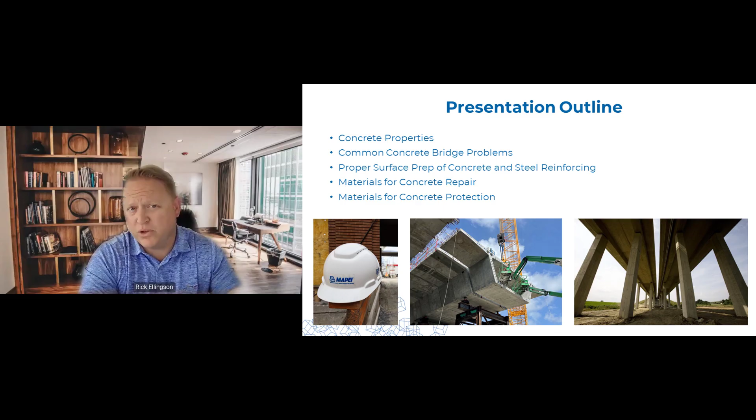Here's a little bit of the presentation outline today. We're going to talk about a review of some concrete properties, some common bridge problems that we see, best practices for surface prep of the concrete, surface prep of the reinforcing steel, some materials for concrete repair, and then also some materials for concrete protection and concrete strengthening.

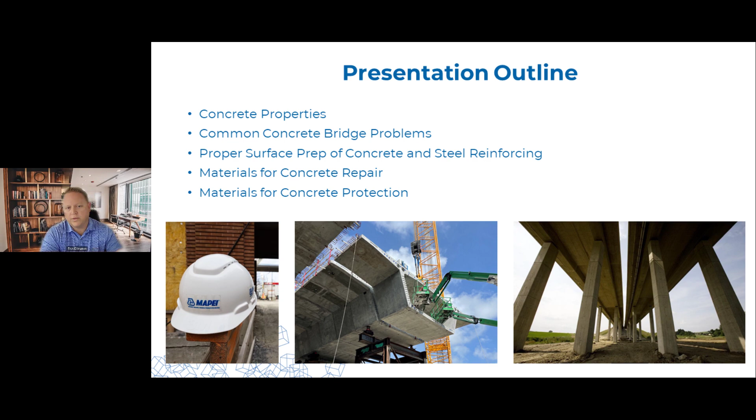So a little bit of background on MAPEI. MAPEI is one of the largest chemical construction manufacturers in the world. We are headquartered in Milan, Italy. Over the last 85 or so years, this kind of shows an expansion of our company globally. We have 24 different product lines where about 6,000 products fall into those 24 lines. Here in the U.S., I represent one of those lines. I'm knowledgeable on that, but I'm going to be talking about quite a few different products today.

One thing about MAPEI being an Italian company is it has this Italian culture of quality. If you think of any Italian product that is manufactured, whether it's Italian cars, Italian shoes or clothes, suits, you always think quality, and that's a cultural thing, and it's the same with MAPEI's products. Being in the industry for a little bit, I've never heard bad things about the quality of the products, and I tell people that we make a top shelf product at a middle shelf price.

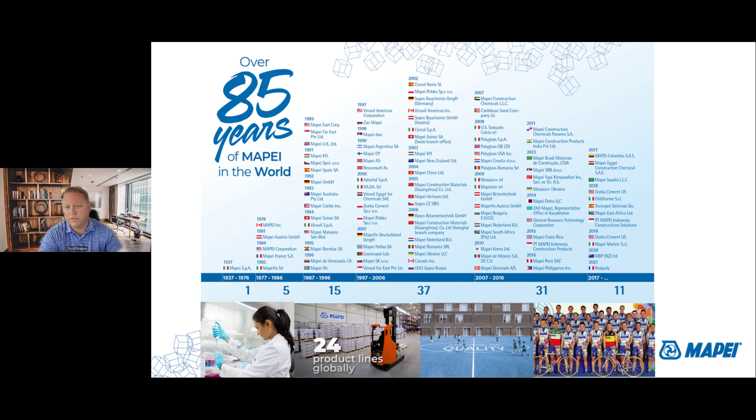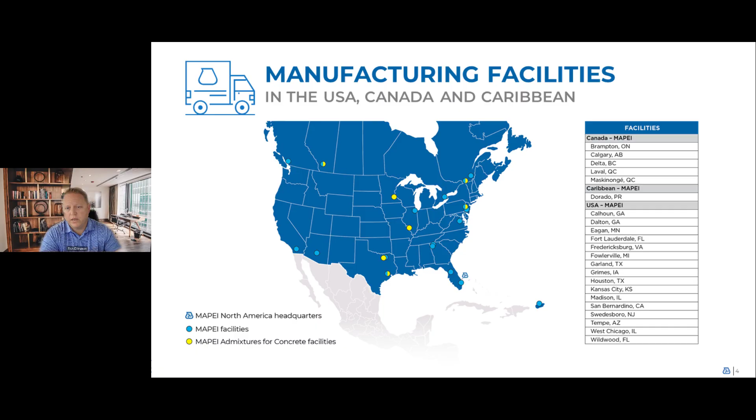For those not that familiar with what MAPEI actually makes and produces, a lot of people have recognized our name because of our sponsorship in the sporting arena over the decades, specifically with cycling, with the Tour de France. This year here in the U.S., MAPEI is the official sponsor of the Andretti racing team. So if you watch any Formula One races, keep an eye out for the blue MAPEI car. Although we are an Italian company, we manufacture our products here in the U.S. We have about 15 manufacturing facilities here in the U.S., and a handful of those also in Canada.

And so on to bridges. This is just a snapshot of the condition of our bridges right now. This is from the American Road and Transportation Builders Association. As you can see, although there's a slight improvement over the last 5 or so years, we have a lot of work that needs to be done. We have about 617,000 bridges in this country, and the issues can range from concrete deterioration to corrosion issues to inadequate funding as well.

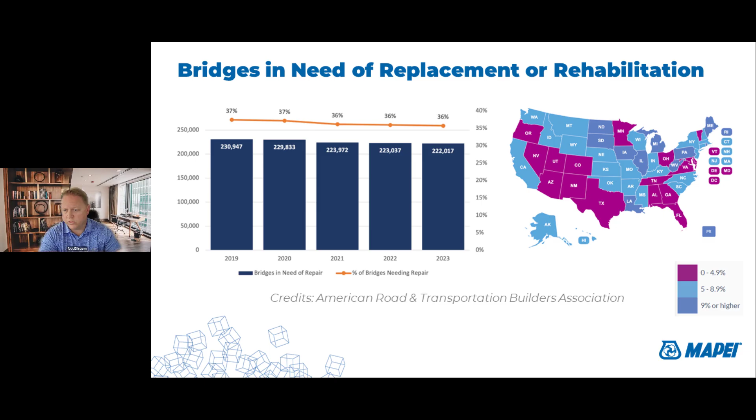Over the last 24 years, this is a list of bridges that have collapsed. There's been about 40 or so bridges that have collapsed. Some of these from deterioration and corrosion, not all of them. If you look at the bottom one there, the Francis Scott Key Bridge, we all know what happened there.

That wasn't necessarily from deterioration, but from a ship hitting it. But when these bridges are being built, and same with buildings as well, they're built to be safe, but not too safe. We can build things even more safer, but it becomes cost prohibitive. So we try to have enough safety factors in there to make sure it's going to be safe for the public's use, but also economical for us as taxpayers.

Now, the Infrastructure Investment Act does offer some hope, but the sheer scale of the problem our bridges are facing is going to be tough to tackle. We're going to need continued or sustained funding, and also innovation with products, having different manufacturers bring new ideas to the table. So that's one of the things I'm hoping to do today, give you a lot of the options that are out there, with MAPEI being one of the larger manufacturers of these products.

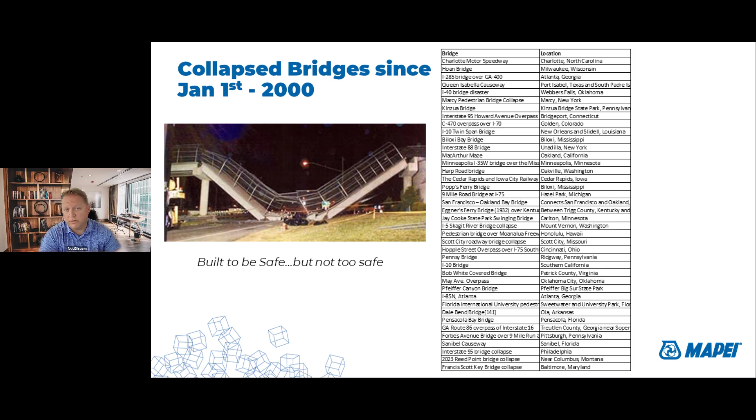What can you do? So a little review on reinforced concrete. It's more than a hard gray rock. Concrete, it breathes, it moves. New concrete is at its largest volume when you first pour it, and over time it's just going to shrink. Compare that to the reinforcing steel, where the reinforcing steel is at its smallest volume, and it's just going to expand over time.

The high alkalinity of the concrete forms a protective passive layer on the reinforcing steel, which helps delay the onset of corrosion. But over time, the ingress of chlorides and carbon dioxide through the concrete cover takes place, through the pores of the concrete by a process of diffusion, and then the onset of corrosion begins. This is when the passive protective layer on that steel becomes destroyed.

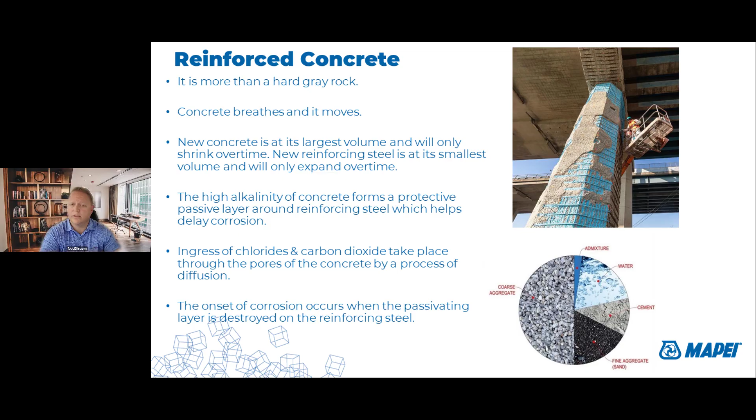So what can go wrong with concrete? Quite a bit. You can have corrosion. This is something that our industry sees quite a bit from either de-icing salts in mountainous regions, DOTs that use that to try to keep the public safe while they're driving, or in coastal areas from the salt-borne air, also working its way through the concrete cover.

You could have carbonation, freeze-thaw, cracking. You could have alkali-silica reaction or delayed ettringite formation. Cast-in chlorides, we don't really see that here in the U.S. We see this a little more in third world countries where they're building something by a beach with sand and ocean water, and sometimes that gets mixed into the concrete and causes problems.

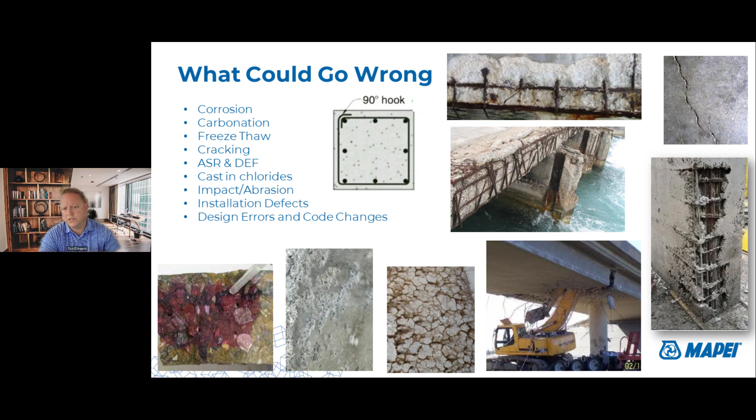You can have impact or abrasion damage. You can have installation defects. They form this and pour it and pull off the forms, and you see all this honeycombing and voids in the concrete. What do you do? And then you can have design errors and changes to the code as well.

So for corrosion, chlorides are typically going to be the most common cause. I mentioned the de-icing salts and the coastal areas. It takes a while for it to move through the cover, but once it gets to the steel, corrosion is off to the races.

You have carbonation. This can typically be seen more at historical or industrial sites where you have a higher level of carbon dioxide. And then sulfates. This is typically coming from the soil in the ground. So the concrete is up against the soil, especially for footers and whatnot, and it can react with the concrete. Sometimes this can take a while, but I've also heard stories of projects where this became an issue a few years after new construction was done.

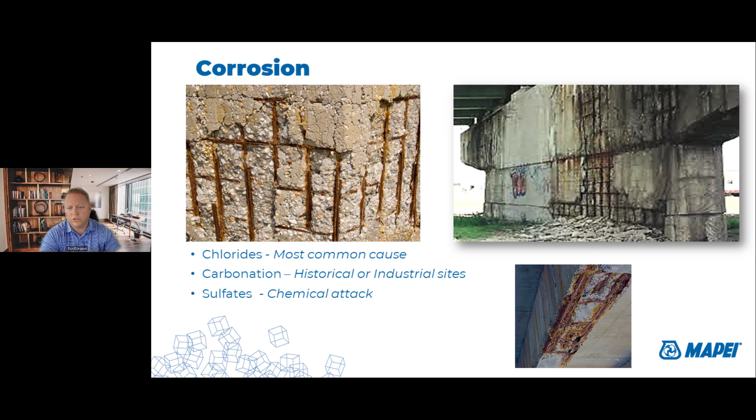The anode is losing electrons, so the electrons are flowing from the anode to a cathodic spot on the steel. It could be right next to it, it could be another mat down. A lot of reinforced concrete steel is all tied together so the electrons can flow to where they need to go. And when this happens, the steel at the anodic region begins to expand, and steel can expand about 7 to 10 times its size, and that introduces additional tensile stresses in the concrete, causing it to crack, and then you have a path for more and more chlorides to get in.

So there's some things you can do for corrosion prevention. This is typically as you're looking at building a structure at the beginning, what can you do? You really want to keep the concrete dry. This can be done through silanes, siloxanes, different types of waterproof membranes.

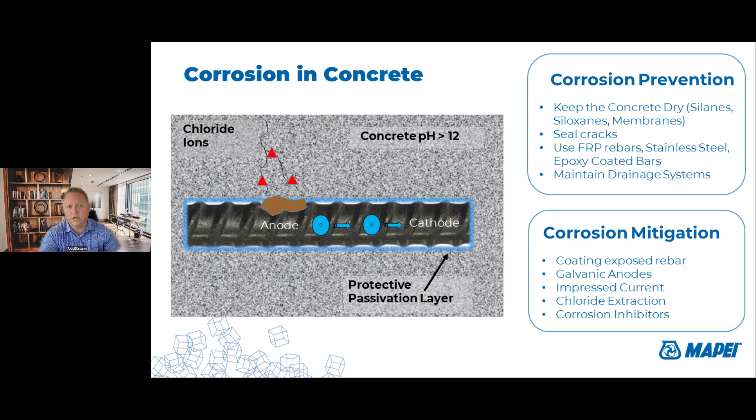There's even chloride extraction, where they exploit the polarity of the chloride ion and try to pull it out of the concrete cover. And then there's different types of corrosion inhibitors that can get sprayed on the concrete as well, and they work their way in and interact with the steel.

So for carbonation in concrete, this is where carbon dioxide penetrates the concrete and it reacts with the calcium hydroxide and produces calcium carbonate. This is going to lower the amount of chloride ions needed to promote corrosion. So typically if you have carbonation in conjunction with chlorides, that's a bad combination. It's just going to accelerate the problem.

Carbonation is generally a slow process. It's seen more in historical structures or industrial sites. Carbonated concrete has a pH around 8.5, where you compare that with new concrete, pH around 12, 12.5.

One of the things you can use to see if you have carbonated concrete is called the phenolphthalein test. It's a dye indicator where they will paint it onto the concrete or spray it on. And if your concrete is pink, you're good. If it's clear, that shows that you have carbonated concrete, and then you can measure the depth that the concrete has become carbonated.

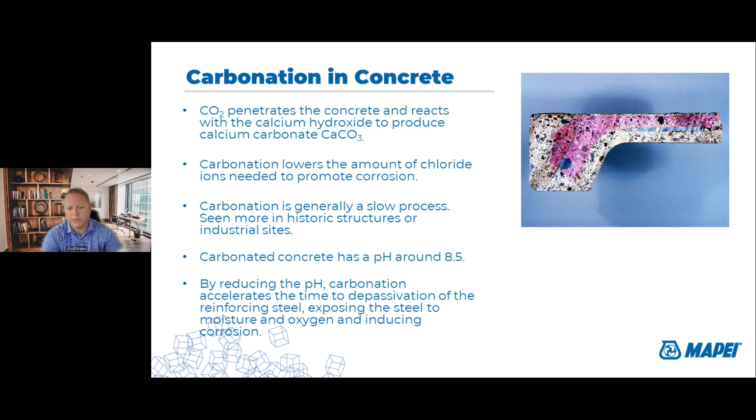By reducing the pH, carbonation accelerates the time to depassivation of the reinforcing steel.

Another problem is freeze-thaw or scaling. As water freezes, it expands about 9%. In moist concrete, this produces a pressure in the pores and capillaries that exceeds the tensile strength of the concrete. This cavity is going to dilate and rupture and can eventually result in scaling, cracking, crumbling of the concrete.

I was subject to this just at my own house a few years ago. I was making some concrete pavers in my backyard for a patio, and I looked at the weather and saw that the temperature was going to drop below 32 degrees for about 1 hour. I risked it. The next morning I woke up and I had all this scaling. So I knew better, but I won't do that again.

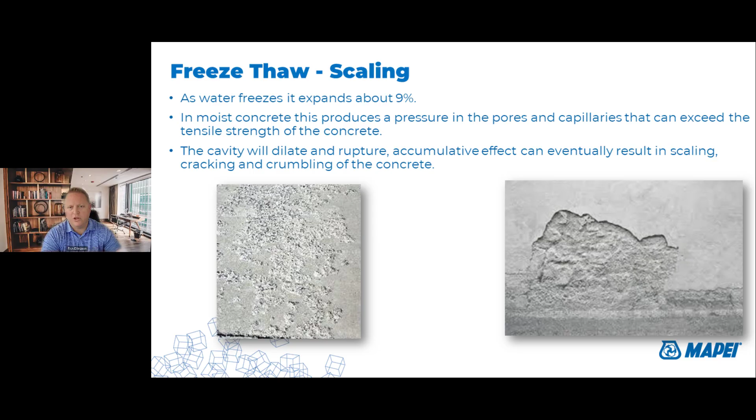Cracking. A windy day can cause rapid loss of moisture at the surface of the concrete. Cracking can come from tensile stresses in the concrete. You can have too much water in the mix, which reduces the strength. Excess water also evaporates and shrinkage occurs. You have seismic events that lead to cracking, corrosion obviously, lack of control joints, and then too little cover or too much cover.

So one of the things that structural engineers, or just engineers, can do is add additional cover to your structures, which is going to significantly increase the life cycle and the durability of them. That just has to do with increasing the path that the chlorides or carbon dioxide have to travel through the cover to reach the bar.

And some concrete members are going to, per code, require a little bit more cover than others. The problem is it's not just 'let's add more cover,' because if you have too much cover without reinforcing going through it, then your concrete's going to crack, and you just negated the whole reason for that cover, because now you have a crack. It's a deep, nice highway for chlorides and moisture to get deeper into your structure.

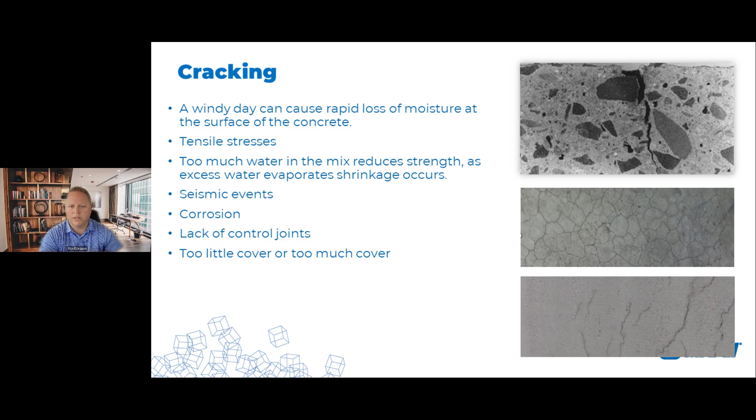Alkali-silica reaction occurs when alkalis from the cement react with certain types of silica minerals present in the aggregates. An expansive gel creates pressure and cracking on the concrete. It's a slow reaction that occurs years or decades after construction. So a lot of people refer to ASR as the cancer of concrete.

There are things you can do on the front end. You try to opt for low alkali cement and non-reactive aggregates. There are different types of admixtures you can use that have some pozzolans to mitigate the alkali content in the cement. You can use different types of coatings or sealers as well.

But if your structure does end up having this, it's hard to deal with. Some of the things right off the bat are just to seal your cracks, try to get water away from your structure by maintaining those joints, and just kind of help reduce that reaction that's going to happen with ASR.

Another one is delayed ettringite formation, or DEF. This is a result of high early temperatures in the concrete, which prevents the mineral formation ettringite. This typically happens at precast yards if they're on a tight time schedule and trying to produce a lot of precast members. Sometimes those high early temperatures can cause problems.

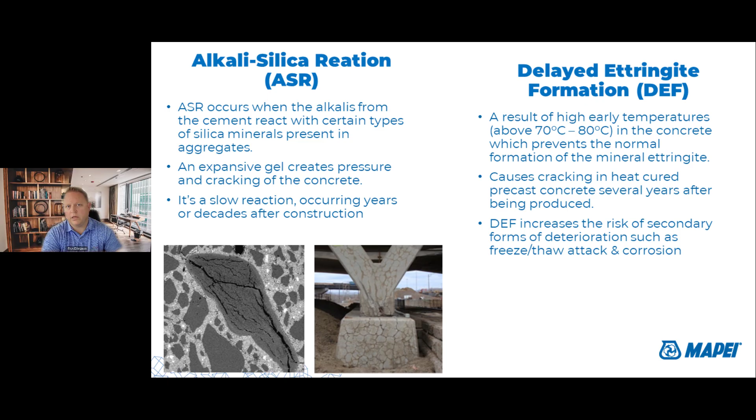I worked with a port authority at one point. They had a bunch of precast piles that were put in their pier, and over time they learned that these piles had DEF. So what do you do? They can't shut this pier down. So in that situation, they looked at trying to slow down the cracking process by applying a structural pile jacket to the piles.

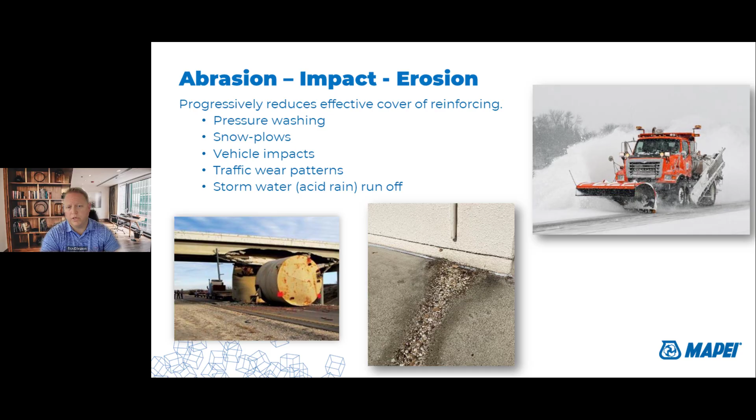Another problem is abrasion, impact, erosion. This can occur from pressure washing, snow plows, vehicle impacts, wear patterns due to traffic, same with stormwater or acid runoff. You also get installation defects from just the placement and position of the rebar. Maybe we've all seen structures where they didn't get the rebar placed right, and there's hardly any cover over it.

Formwork placement and the support of it, if the formwork buckles or the concrete pours out. And then quality control issues during mixing, transportation, and placement.

There's lots of times where a concrete contractor who's going to be forming the concrete will ask the truck driver to add a little bit more water, because it's going to make it easier on him to form and flatten the concrete. Sometimes the truck drivers do it and don't report it, so you have a specified mix, and by adding the water, you're not getting what you thought you were.

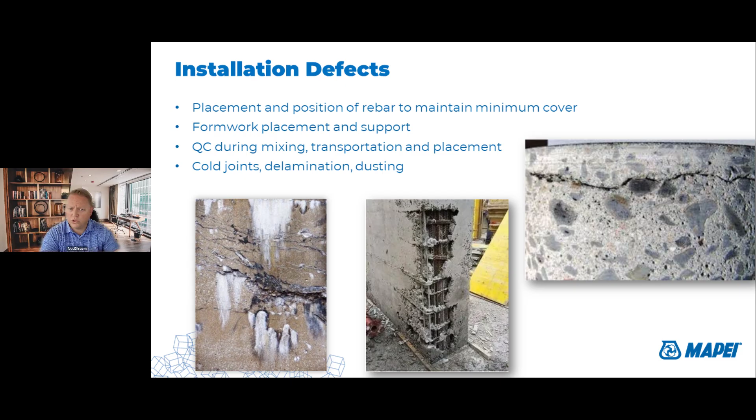Cold joints, delamination, dusting. Another thing is design errors. A great example of this is with the ACI code for concrete columns before the 1970s.

At that time, they said just put a 12-inch spacing on your ties, regardless of the column size, and they didn't have any hook details. We learned a painful lesson through the Loma Prieta earthquake, where you had a significant loading event. The concrete cover cracked off, and the ties basically opened up, causing the longitudinal bars to buckle and fail.

So the design community took a step back and said, how can we do this better? Now the spacing and size of the ties is dependent on the column size and on the longitudinal bars. But more importantly, they require this 135-degree hook, so that if you have a significant loading event, that concrete is going to put the tails of that hook in compression and keep it from opening up.

So that was a learning lesson, but there are still a lot of columns from before the 1970s that have this issue.

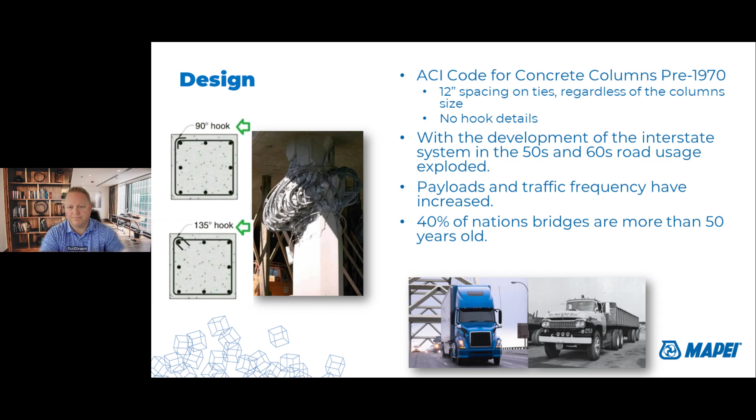With the development of the interstate system in the 50s and 60s, road usage has exploded. A lot of these bridges were not built for the size of vehicles and the frequency that we have them exposed to today. Think about last week being Amazon Prime—this week there are a lot of trucks going over bridges delivering those packages. And 40% of our nation's bridges are currently more than 50 years old.

So some best practices. We're going to look quickly at best practices for concrete repair, the reinforcing steel, surface prep, placement of new material, and repair materials and their applications.

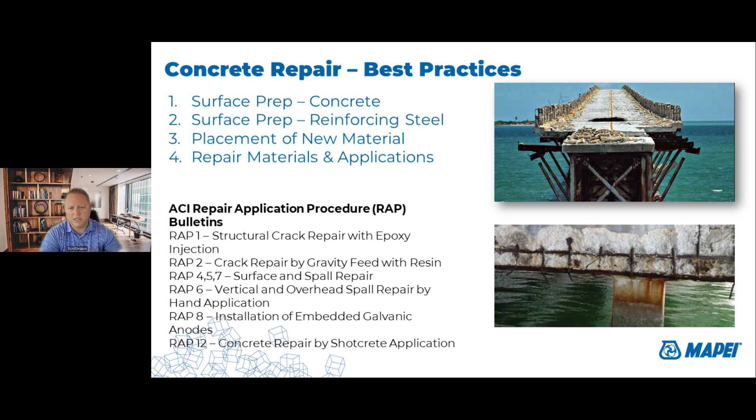And if you're not familiar, ACI has these great repair application procedures. They call them RAP bulletins, and they go into structural crack repair with epoxy, surface and vertical overhead repairs, installation of galvanic anodes, and shotcrete application. So it's just a good reference if you're not familiar with that.

So for the surface prep of the concrete, per the International Concrete Repair Institute, you want to square off your patches, and typically you're going to want to go 6 inches beyond the delaminated area. I know as an owner or someone footing the bill, you're looking at this thinking this is going to take more repair material and require more labor. And that is true, but this has proven over time to be the best practice. So if you don't have the time or money to do it right the first time, hopefully you have the time and money to do it right when you need to go back and fix it.

Edge conditioning: you want to avoid feather edging. A lot of manufacturers say their products can be feather edged, but it's just not a good practice. You can never truly go down to zero. Ideally, you want to condition the edges on these repairs by going down about 3/4 of an inch. That's going to make sure you're not going to have a weak spot where you would have a feather edge. And then the surface profile.

ICRI has these different CSP chips, and depending on the product you're using, whether it's a construction grout, bridge deck coating, epoxy, or a sealing, they're going to call out a different type of surface profile. The surface profile helps open up the pores, and it's going to provide a good mechanical bond for the product you're using.

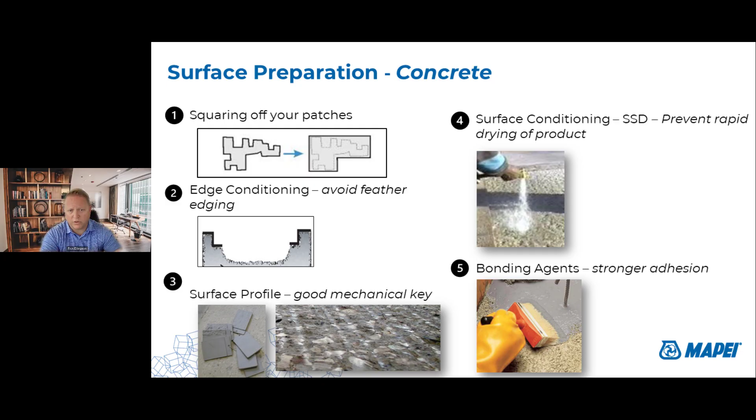There's also bonding agents. These provide a stronger adhesion, they help fill cracks or any little cavities, and there are a lot of applications where you can bond old concrete to new concrete as well. So that's the surface prep of the concrete, just kind of 5 best practices to consider.

So then on the steel: one, if you have a section loss, depending on how much, you're going to want to consult a structural engineer. The different types of members will determine what's an acceptable section loss. The engineer is going to look at that and decide whether to add additional reinforcing through fiber reinforced polymers, or cut the bad section of the bar off and splice a new bar in, but that'll be a decision that they make.

Another thing is you want to clean the steel. You want to get rid of the corrosion and any scale that can be on the bar. Typically abrasive blasting or water jetting are good methods to reach that.

Then coating the steel. Typically, if you're applying a patch material on the area you've removed that was delaminated, that patch material is going to have a nice high pH, and it will recreate a passive layer in that spot. But sometimes, as engineers, we want to be a little more conservative, and coat the steel with either an epoxy corrosion inhibitor, or there are different types of cementitious ones as well. MAPEI has ones where besides coating the steel, you can spray the product on and it'll also act as a bonding agent, so you're accomplishing two things at once.

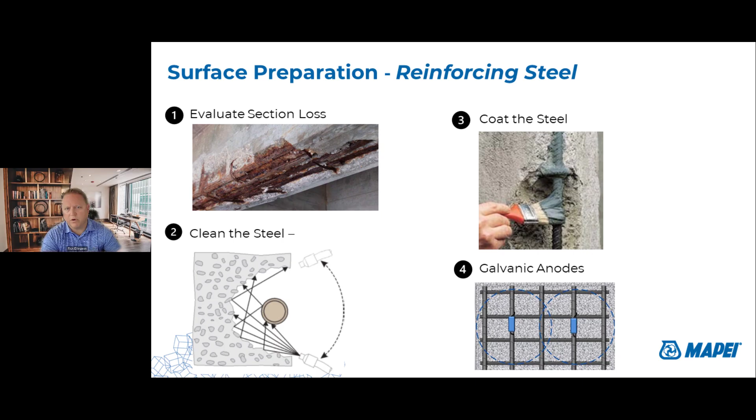And then there's also the consideration of using galvanic anodes. Corrosion is a loss of energy; your steel is losing electrons. Galvanic anodes basically add energy back into the system. The anodes have a zinc core, and they give off electrons to the steel to keep the steel from losing electrons.

So repair materials, some common questions. What properties does the host concrete have? Is the structure going to remain in use during the repair? If you have a bridge deck at say 3,500 psi, are you going to want a 10,000 psi patch material?

Ideally, it'd be nice to try to marry up similar properties. Now, sometimes that can't be done because you're looking at how long do I have to close traffic off. A lot of DOTs, if you close it off for a long time, you're going to get the public pretty upset with you. So sometimes you just want a repair material that has a higher early strength that's going to hit 3,000 psi in under an hour, so you can open up your bridge quicker.

What's the min-max thickness of the repair area? That's going to also change the product formulation you're going to look at to get the best product. And then what needs to be done after the repair? Is there any type of coating, maybe an acrylic coating? Some DOTs I've seen will put a fiberglass epoxy over their patches that helps restrain the repair, keeps moisture from getting in on any potential edges on the crack that will develop on the edges of the repair.

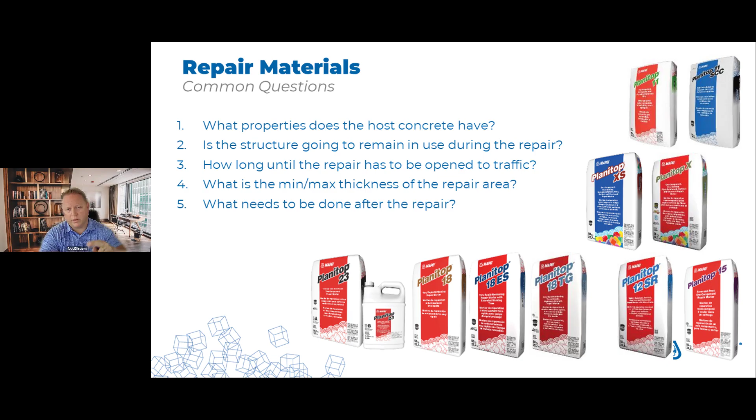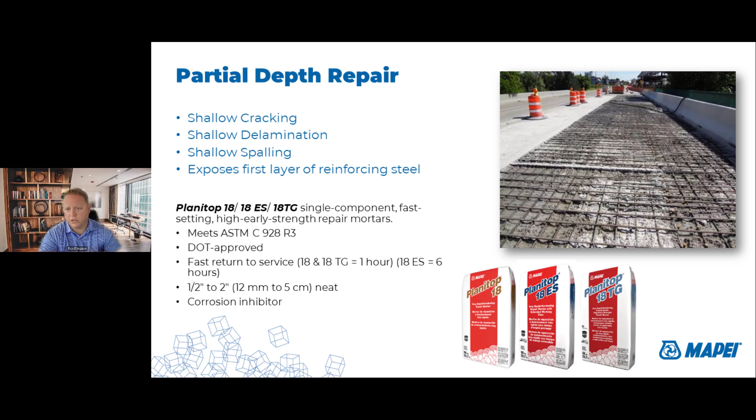So for partial depth repairs, this could be shallow cracking, delamination, or spalling. For these repairs, you're going to be exposing the first layer of your reinforcing steel. A great product for this is our Planitop 18. We have an 18 extended set, giving you a little bit more working time, and also an 18 trowel grade. This product is approved on most DOTs here in the U.S., and it has a high early strength. Like I mentioned, you're going to be over 3,000 psi in under an hour.

Full depth repairs, you're going a little deeper. These are going to have to be a little bit more of a fluid type material. You're going to have a longer working time, but you're also going to have a longer cure time for those.

MAPEI has a whole suite of these products. Our Planitop 11, the pre-extended, pumpable, pourable. We have a self-consolidating one. This is nice where you don't need to have a contractor provide vibration to get rid of air pockets in your concrete. It's going to do that. It has super plasticizers mixed in with the mix to do that.

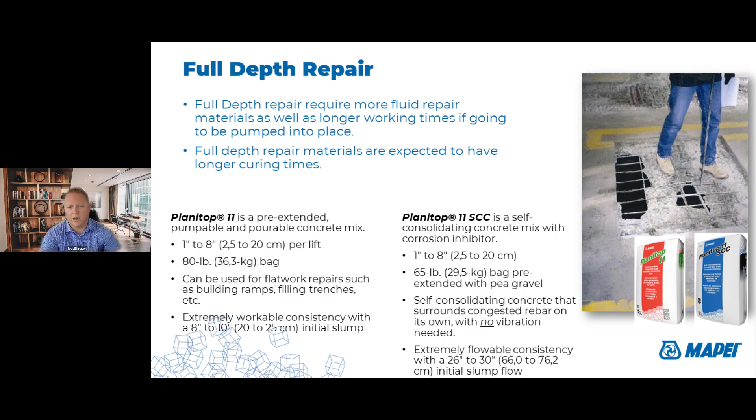Extremely flowable, this product. And then another one is this Planitop 15. This is a form and pour. It has fumed silica in it and corrosion inhibitors. This works great in different types of marine environments for doing deeper type repairs.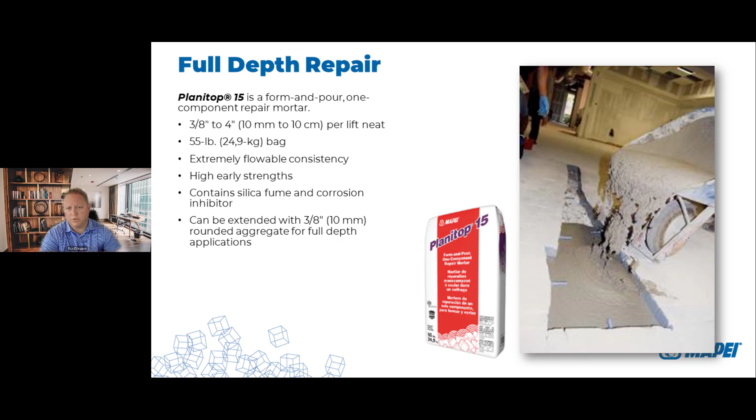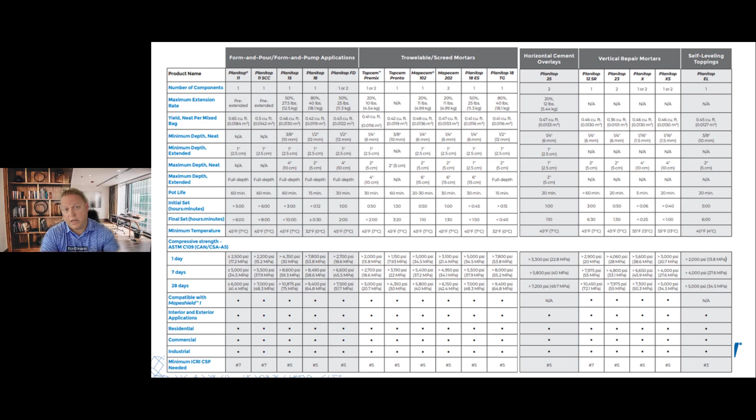Can I add aggregate to this? What is my 1 day, 7 and 28 day compressive strength? If you would like this, at the end of this presentation I'll have my contact information. You can just shoot me an email. If you like, I'll mail you a hard copy, or I can just send you a PDF of this as well.

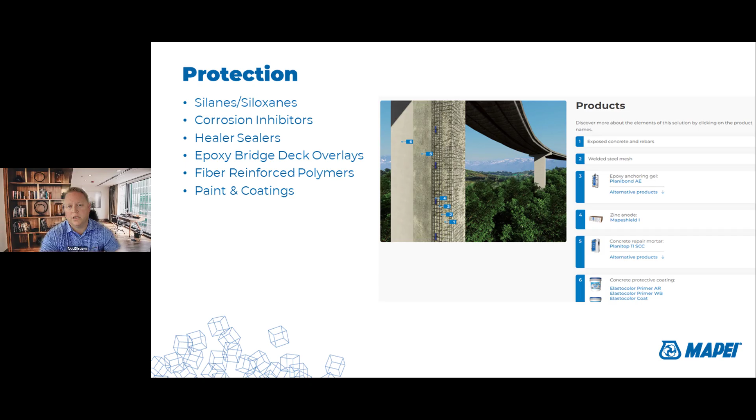All right, so we talked about repair materials. Now let's get into protection. This can be with silanes, siloxanes, different corrosion inhibitors. There's healer sealers that are used on bridge decks commonly. Epoxy deck overlays, fiber reinforced polymer, and then different types of paint and coatings.

So with a silane and a siloxane, this creates a hydrophobic layer which keeps water from penetrating the substrate. They act as a water repellent and effective chloride screen. Silane is a smaller molecule size. It's going to have better penetration into the concrete, and because of that penetration, it's going to have less subject surface wear as well.

The siloxanes are not going to penetrate as deep into the structure, and they're going to react more with the moisture in the air. They're better at water beading, and that picture shows the water beading properties that it has. They have better UV resistance as well.

And so MAPEI has some that are a mixture of a silane with a siloxane, and we have some that are just silane. These products are going to have a minimum visual change in the appearance of your structure. They're non-film forming, vapor permeable. You can use it on other things besides concrete - on clay, on brick, and on stone. It's not subject to surface wear and weathering - the surface wear more so with the silane, the weathering more so with the siloxane.

But these are going to require reapplication, and it's not effective over cracks or voids. You need to repair the cracks and voids ideally before utilizing this product. As far as reapplication and which one to use, I typically tell people if the structure or concrete members you're trying to access are difficult or costly, it's probably better to go with a higher percent silane at the front end, giving you more time before you need to reapply. It's a little more expensive, but you're saving on the continual application over the years and decades with this product.

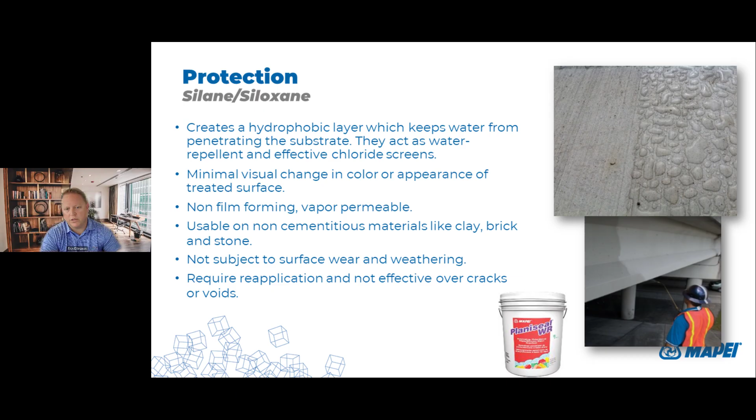There's migrating corrosion inhibitors. This is a surface applied corrosion inhibitor designed to penetrate the concrete and protect the embedded steel reinforcement. It reacts with the metal ions on the bar and helps form a protective film on the steel. It's designed to delay the corrosion process and reduce the overall corrosion activity taking place. It's not a vapor barrier, and it does allow the concrete to breathe. You can spray this on or roll it on with a brush, and it does not require the removal of good concrete.

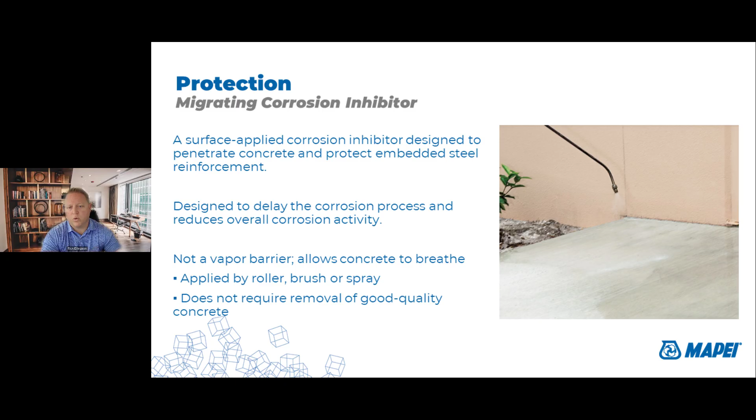There's also protection healer sealers. This is the low viscosity epoxy that's designed to flow and penetrate the finest cracks. These have a centipoise of around 80 - think of water at 1, so that's very low. The cracks are sealed against further intrusion from chlorides, water, dirt, etc. It's easy to apply by squeegee, and there's little surface preparation needed. This really reduces the amount of frequent repairs and maintenance needed and provides cost savings on your bridge decks.

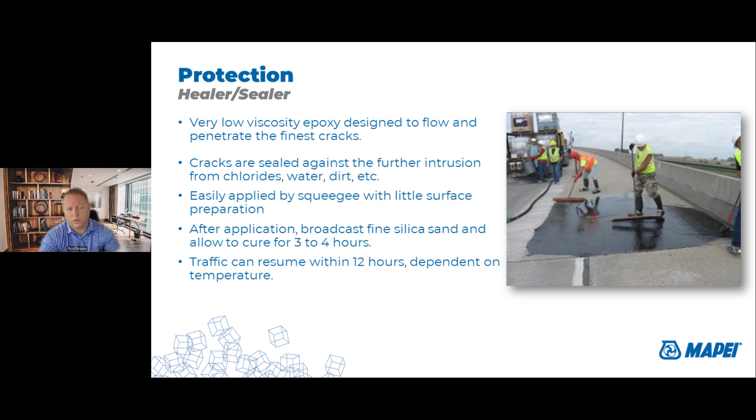I know some DOTs are big fans of this. After application, you want to broadcast a fine silica sand and allow it to cure for 3 to 4 hours. Once again, you're working with an epoxy, so adding something that increases the coefficient of friction is ideal. Then traffic can resume within 12 hours, depending on the temperature - if it's hotter, it's going to cure faster.

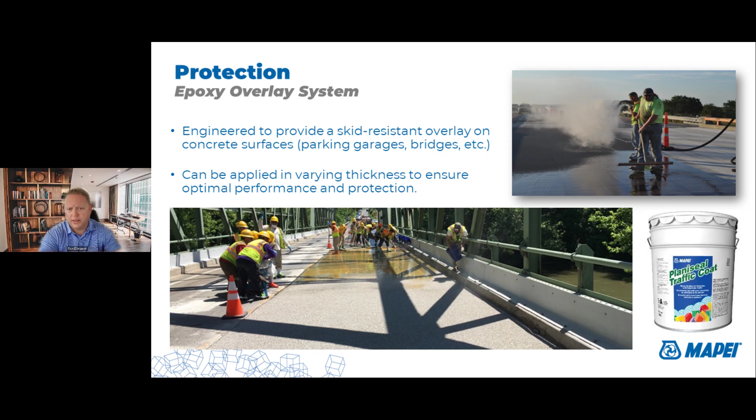Then there's epoxy overlay systems. These are engineered to provide a skid-resistant overlay on a concrete surface, and are also used in parking garages. Some insurance companies have provided information to bridge owners and transportation municipalities, showing where a lot of accidents tend to happen, so those owners can apply something like this product to increase the coefficient of friction and help increase the safety of drivers. This can be applied in various thicknesses to ensure optimal performance and protection.

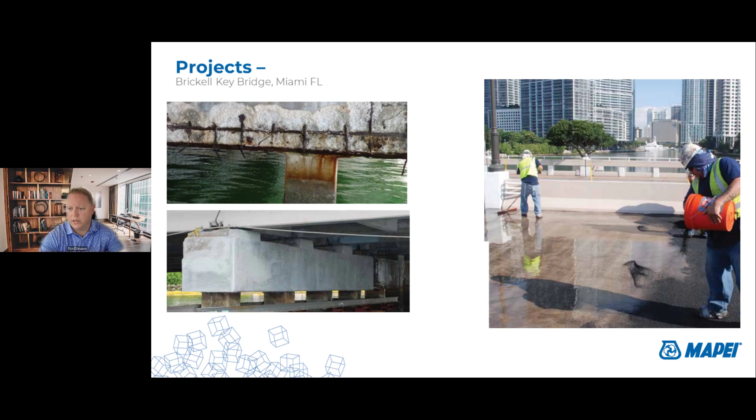So one project down in Miami, Florida, we used several of these different types of products. This is the Brickell Key Bridge. You can see the pile caps here with a lot of corrosion - we clean those off and use this Planibond 3C rebar coating on them. For the patch material, we use Planitop 15, which has fumed silica and corrosion inhibitors, designed for these harsher environments. For the deck, we use Planiseal traffic coat, and you can see this gentleman casting some clean quartz sand aggregate in here - there are different types of things you can use to help with that friction.

Another type of product is fiber reinforced polymers, or FRPs. This is a fiber with very high tensile strength. Your standard construction bar sits at around 60 KSI, while these fibers have a tensile strength of about 710 KSI - over 10 times the strength. Unfortunately, there's no way to utilize a dry fabric on concrete; we need something to cause it to stick, so we use epoxy. But using epoxy lowers the overall tensile strength, bringing that 710 KSI down to, say, about 210.

I just used an example of MAPEI's middle of the road strength fabric here. We also have glass fabrics as well. These are a little more economical, but won't have the same strength and durability that carbon fiber has.

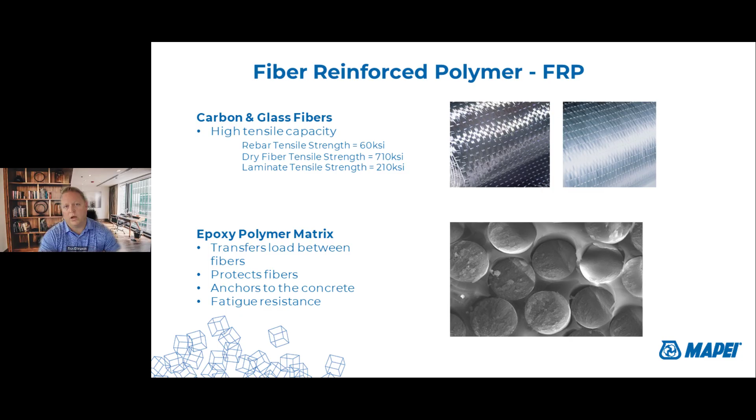So these fibers are very small, about 1/25th the size of a human hair. These get saturated in an epoxy, which protects the fibers, helps transfer the load, and ultimately anchors it to the concrete. It also provides great fatigue resistance.

So reasons to strengthen your structures: you could have an increase in the load-bearing capacity. Some of these old bridges were not built for the size trucks we use today, or for the frequency of use. I've talked about some of the design errors, and there's also construction errors.

I remember hearing a great case where two brand new bridges were being built on an interstate. The contractor had finished the eastbound bridge and was working on the westbound bridge, when the inspector comes by and tells him, 'It looks like you've left half of the steel out of this bridge deck.' The contractor says, 'No, I'm doing this the exact same way I did the last bridge.' Well, it turned out that the contractor and the first inspector had both missed it. So now you have this major construction error, a new 9-span bridge built with half the steel on the deck. Fortunately, the owner knew about using fiber reinforced polymers after the fact to strengthen this new bridge so it could be put into use at its full capacity.

Also, another common reason is to replace the loss of capacity. This could be from corrosion of the steel, from cut or damaged reinforcing steel, or from impact damage, a fire, or other natural disasters.

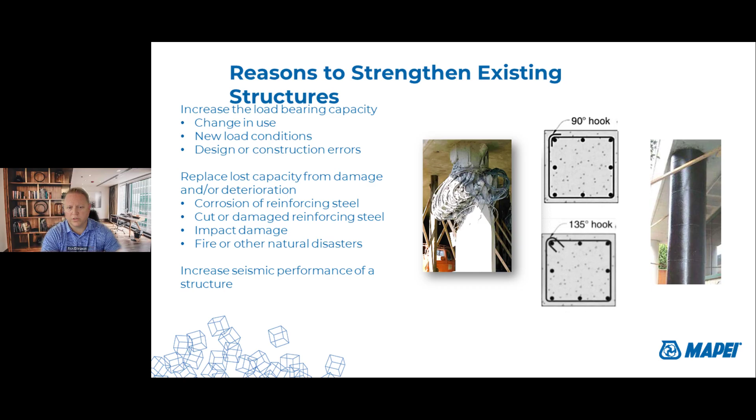Sometimes we need to beef up our concrete members for the seismic performance of a structure. This is where the material first got a good look, after a lot of those California earthquakes that happened in the 80s.

Some of the advantages of using this material: it's very lightweight, so you're not adding a whole lot of dead load to your structure. This is great, especially for seismic retrofits, where adding a lot of weight would be detrimental.

It has a high strength to stiffness ratio and is non-corrosive. That's just a miracle material in itself, where your structures are losing strength because they're corroding, and now you can put something significantly stronger that won't corrode. It has a low profile, about 1/16 of an inch, which works great, like in a parking garage, putting it on the bottom of the joist. You don't have a lot of area to add, otherwise the roofs of trucks would be scraping on those joists.

Fast installation and cure times, typically by the time you put it up, 24 hours later the system is working. Also, minimal heavy equipment is required to put these materials up.

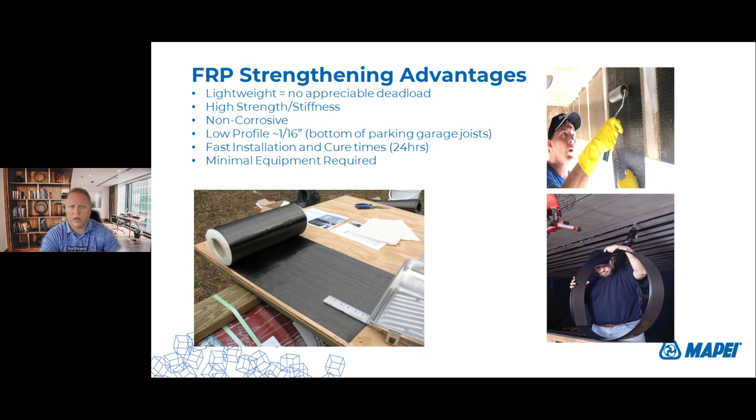So at MAPEI, we have fabrics, we have these plates that this gentleman is holding, and we have different types of bars that we use, carbon and glass bars as well.

So for engineers, these are just some typical strengthening ranges. The type of member, the existing reinforcing, the cover, and strength of the concrete, the F prime C, all play a factor into that. But typically for flexural, you're looking at a 40 to 100% strength increase, for shear maybe 20 to about 150%, and axial 20 to 100%. For applications where you're trying to increase the axial capacity, you'll be doing a confinement wrap.

And that's actually some of the best applications for FRP, because the material is being wrapped around itself, so you're not relying as much on the bond of the fiber to the concrete. That's referred to as contact critical. Whereas the flexural and shear applications really rely on the bond, so that's referred to as bond critical.

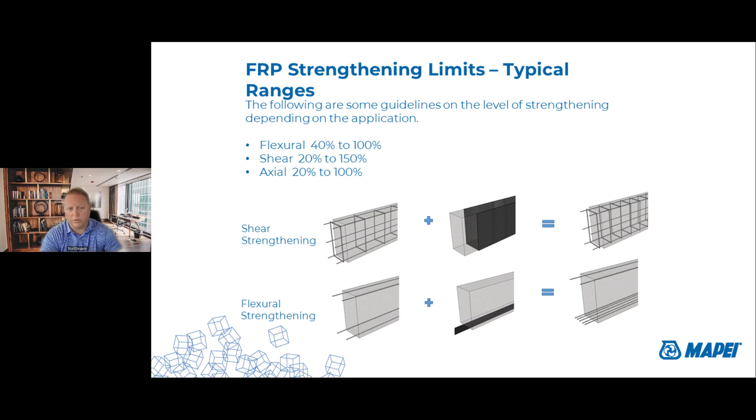There are different things that the ACI 440 guide lays out for. You need to test the concrete strength, the pull-off strength, before installation. After you've installed it, you want to test to make sure that you're over 200 PSI, to make sure it's bonded properly. There are two common design guides, and the more common one used is this ACI 440.

And the other one for some of the bridge community is the AASHTO one for design of FRP systems for strengthening concrete bridge elements. Now the ACI 440, both of these are just design guides, but this ACI 440 is actually going to become a code in 2027 when the IBC releases their new update. And I think that's going to cause a lot more engineers to feel comfortable with it.

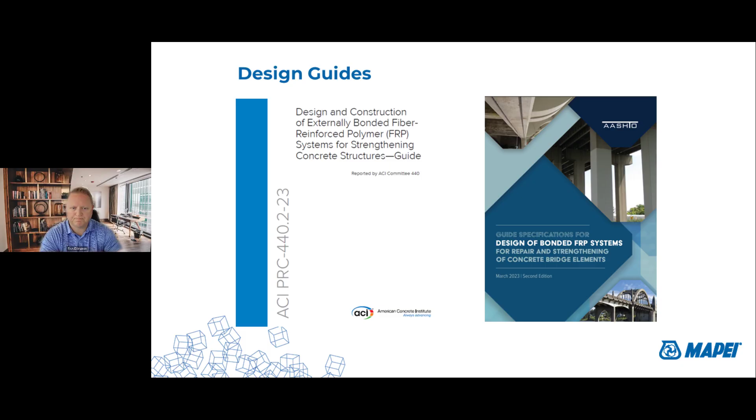Now MAPEI, as I mentioned, we're a large construction product manufacturer. We're not a structural engineering design firm, but we participate quite a bit in that design process. We have what we call MAPEI Structural Design, a cloud-based calculation tool. Because we're an international company, we follow a lot of different international codes and guidelines, and we're going to be releasing this here in the US in the coming months.

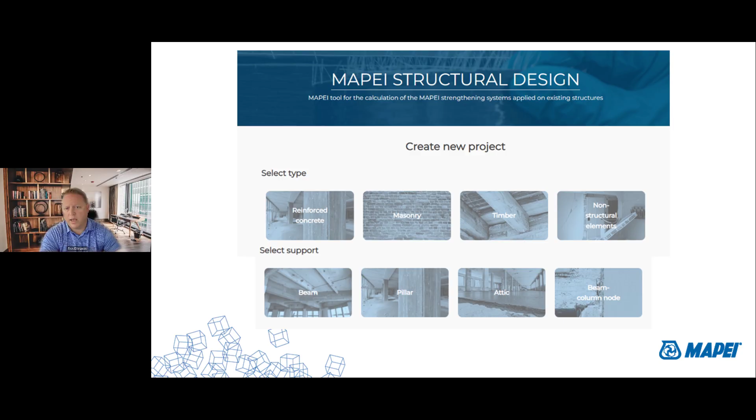You just go through and pick your code, say ACI 440 - I don't believe we're going to have the AASHTO to start off. Then you pick if you're looking to strengthen concrete, masonry, or timber, and whether it's a beam, a column, or a slab. Then you put in the project information, and it shows you the code you're using and the equations in the code, and gives you a report from that.

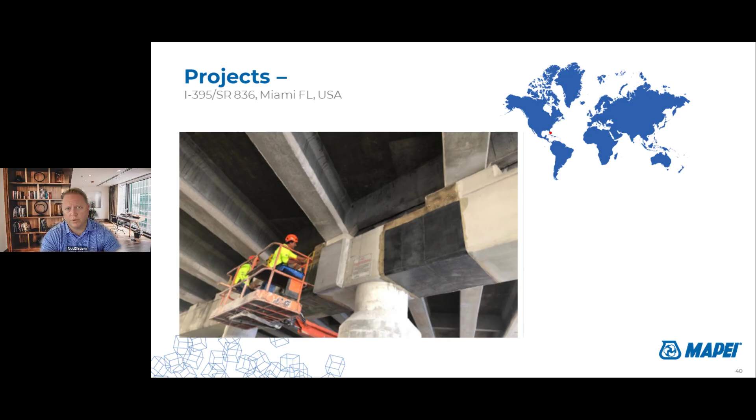One recent project we're just working on is this I-395 in Miami. You have these bridge bent caps here - this shows this gentleman doing a stirrup type wrap to increase the shear where the column and that cap intersect. Here's one in Lithuania.

They wanted to stiffen it and also increase the load-bearing capacity of this, but they did not want to add any cross section to these piers - it's sort of a historical site there. So in that situation they used a lot of MAPEI's carbon plates going vertical, and you can barely see we used MAPEI carbon fiber that went around in a hoop direction to help give it a little bit more axial capacity.

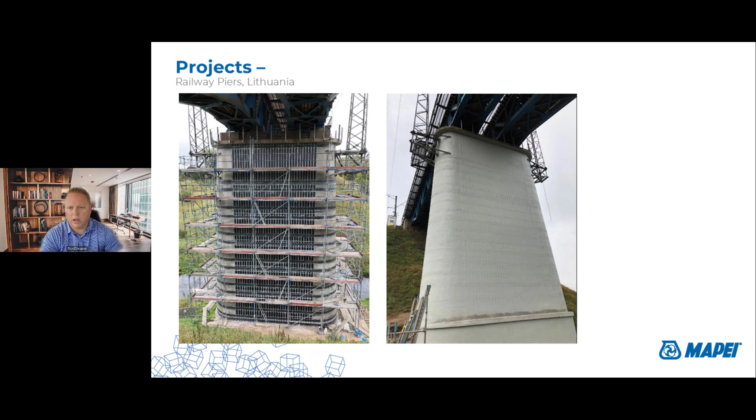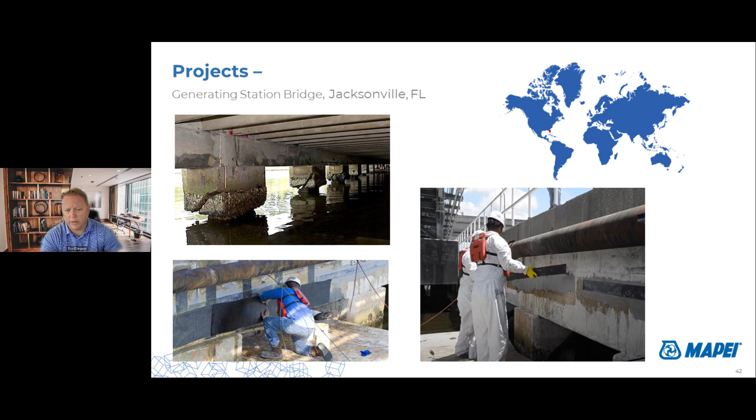Here's a project - a generating station bridge in Jacksonville, Florida. I think they had like 64 piles and 63 caps that needed repair with some of our repair grouts and mortars. We also used different types of carbon fiber plates and carbon fiber wraps to strengthen this.

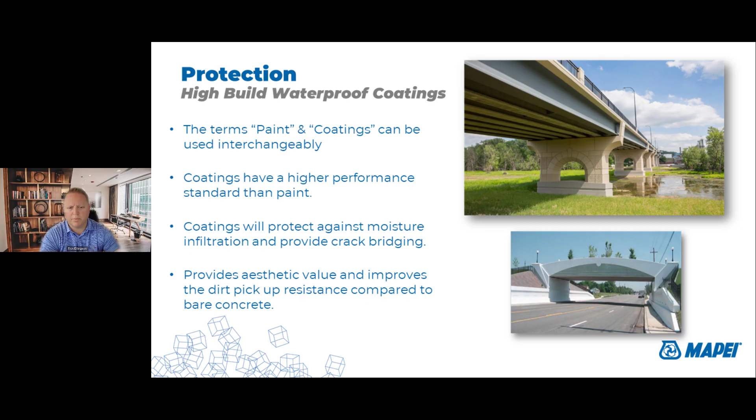Another type of protection system is coatings. Typically a lot of people use the word paint and coatings and think it's the same thing, but coatings actually have a higher performance standard than paint. Coatings help protect against moisture infiltration and help bridge cracks. But both paint and coating provide aesthetic value and also improve dirt pickup resistance compared to just bare concrete.

Now this is another product - not a repair or strengthening product, but one used in the bridge community. We have this segmental bridge adhesive epoxy. These get put on the bridge segments, acting as a lubricant and a sealer. It has a long working time, and we have it formulated for 4 different temperature ranges, so depending on your project site and time of year of installation, we have one formulated for that temperature range. These create a water resistant barrier as well.

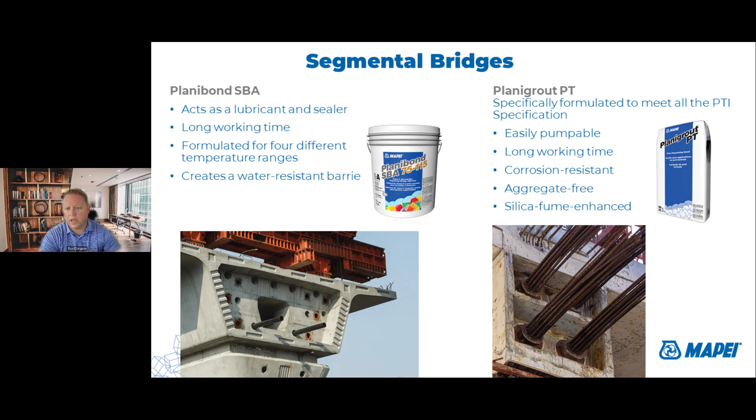Another product is our post-tensioning grout, our Planigrout PT, specially formulated to meet all the PTI specifications. It's easily pumpable, with long working time, corrosion resistance, aggregate-free, and silica fumed.

Here's a project where some of that segmental bridge adhesive was used. It's kind of hard to see, but look at that picture on the right - they've mixed the epoxy and put it on by hand or rolled it on. They have it worked into the shear keys, and then from there they'll lift and put that into place and clamp it down.

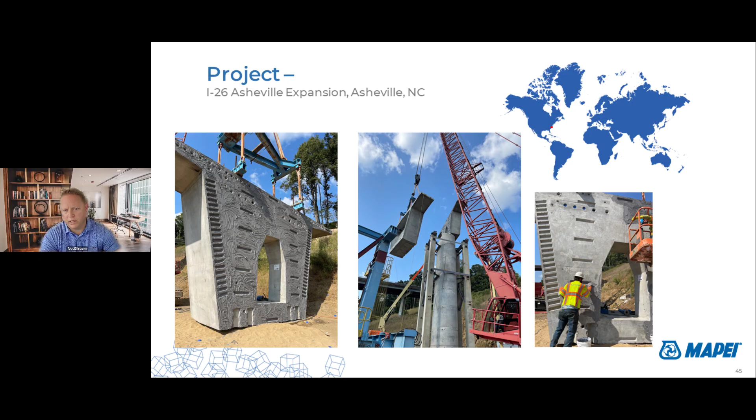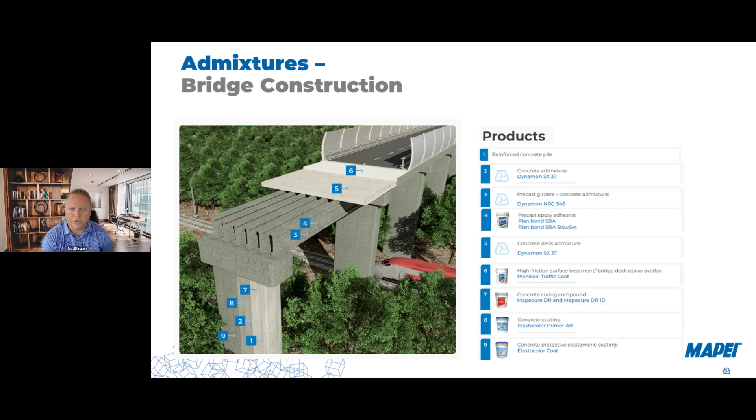Something I'm not going to be able to get into is our admixtures. MAPEI has a very good sized admixtures product division, and they partner with a lot of batch plants around the country. So if you want more information, you could send me your contact information and I'll pass it off to the appropriate person.

And then as far as trying to figure out what products are approved with your DOT, our website has this information. If you go there, you can click on your DOT and it'll show you the products we currently have approved. We also have a very long list we're in the process of getting approved with the various DOTs - they have different requirements, so this takes some time and a lot of effort.

So with that, I'll go ahead and open it to questions that you might have.